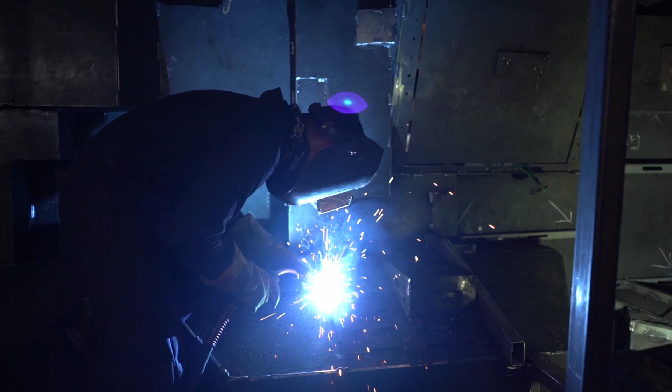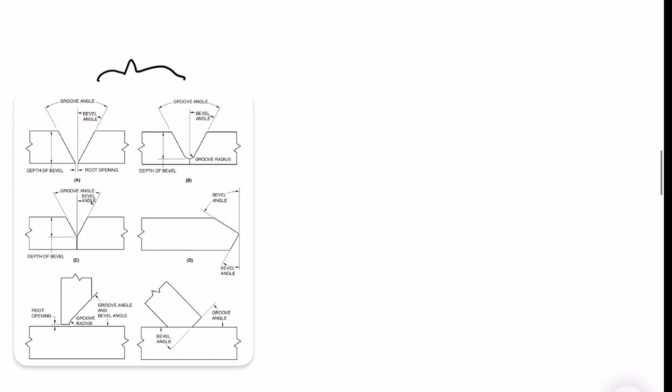Welding and inspection personnel must be capable of identifying individual features that make up the joint, as you can see here. This is a groove joint. Now, if you join the two of these, they are now called a groove weld.

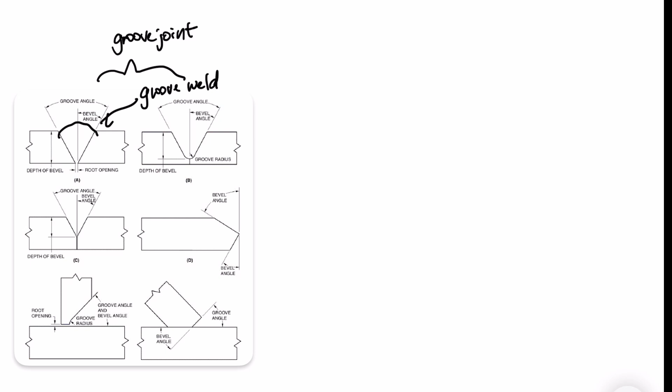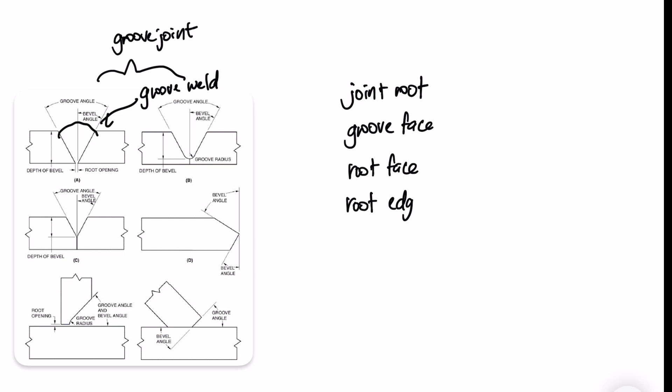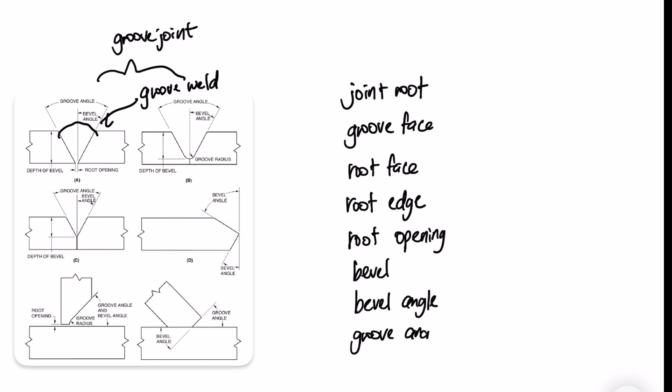It is imperative that welding inspection personnel be familiar with these, because these welds are very common in the industry. The following nomenclature are common for these, such as the joint root, groove face, root face, root edge, root opening, bevel, bevel angle, groove angle, and groove radius. Now let's run it down one by one.

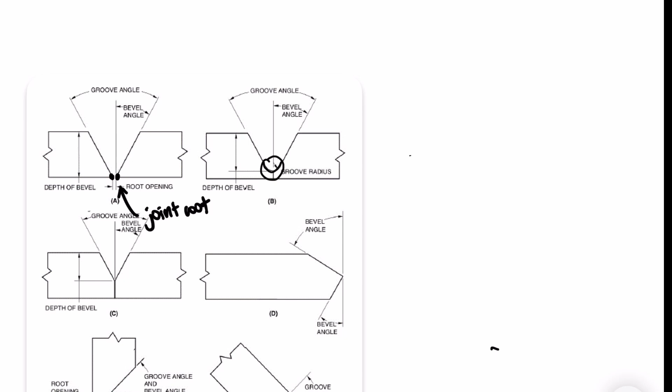Now first, we need to identify where the joint root of these work pieces is. Now this is the joint root that we're talking about. This point, or this joint root, is the beginning of the root opening that will denote the separation between the two work pieces. Now if you can see this line right here, this shaded line, this is the joint root where it denotes the beginning of the root opening. Now this line is the joint root.

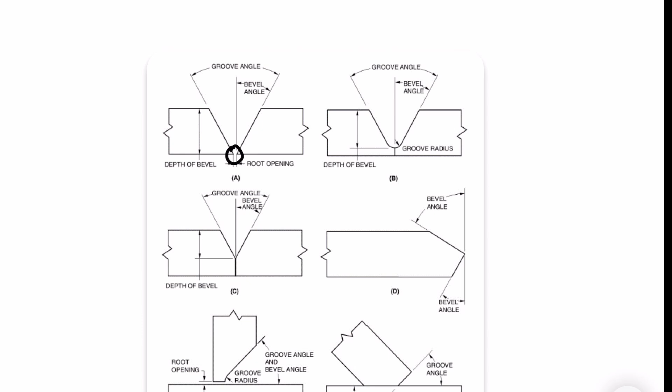Root opening, as you can see here, is described as the separation between the two work pieces. Now these are the work pieces. Now this has an opening of about 1 to 2 mm, depending on the size, depending on the specification. Sometimes I saw 3 mm in some of the drawings that I've encountered.

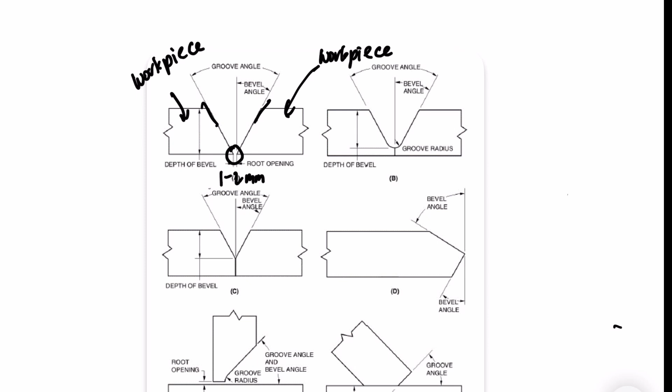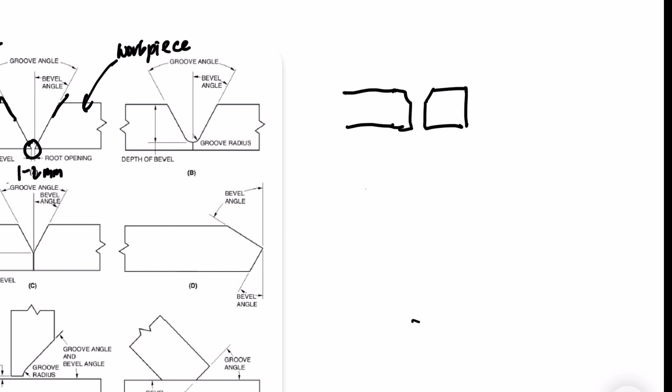And the bevel, as you can see here, is the angular edge preparation that is commonly known for welding fitters. For example, if you have a pipe here, these are the bevels that are commonly prepared by pipe fitters. An exaggerated view of it. Now this bevel is also known as the chamfer in some cases.

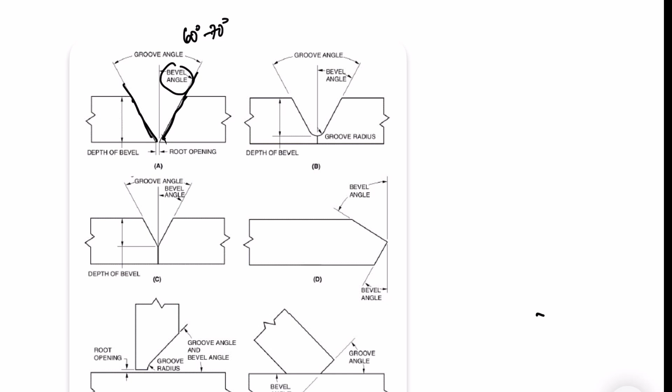Now the groove angle is the total included angle of the groove between the two work pieces, as you can see here. I saw some specifications that specify this groove angle at about 60 degrees to 70 degrees, something like that. And the bevel angle is the same as the groove angle, this one. They are basically the same if the weld looks like this, a single bevel groove weld, wherein the groove angle and the bevel angle are the same. Usually for these kinds of welds, the bevel angle is 1/2 of the groove angle.

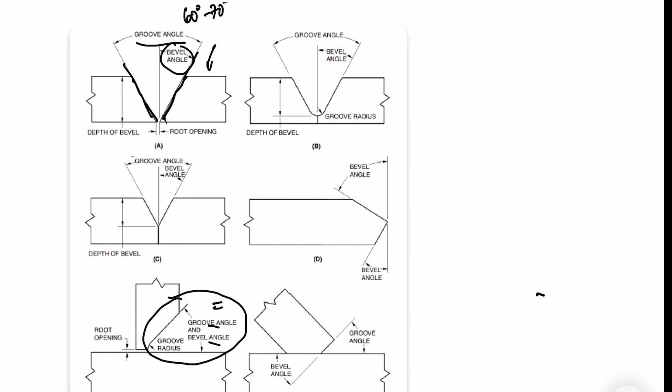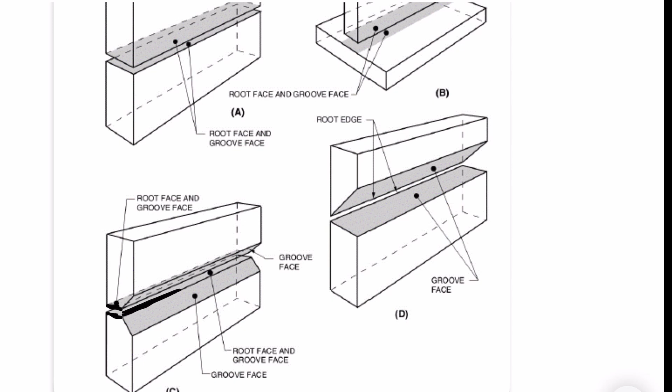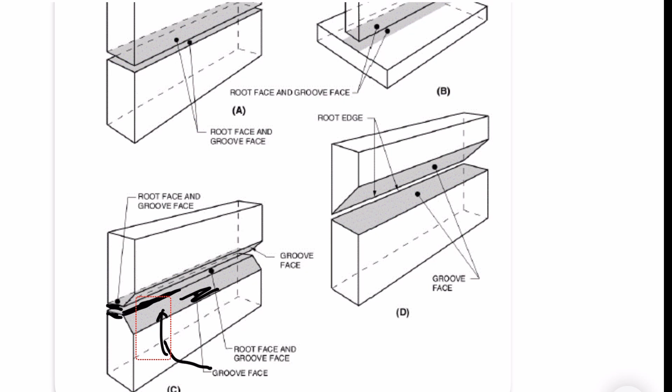How about the faces? The groove face and the root face. This is an illustrated example of the root face and the groove face. Basically, the root face is the portion of the groove face within the joint root. As you can see, this is the joint root, and the portion of the groove face that is at the joint root is this one. So this is the portion of the groove face that is within that joint root, and the groove face itself is the surface of the groove, which is this one. The groove face, this one. If you're going to look at the elevation view or the front view of it, this is the groove face.

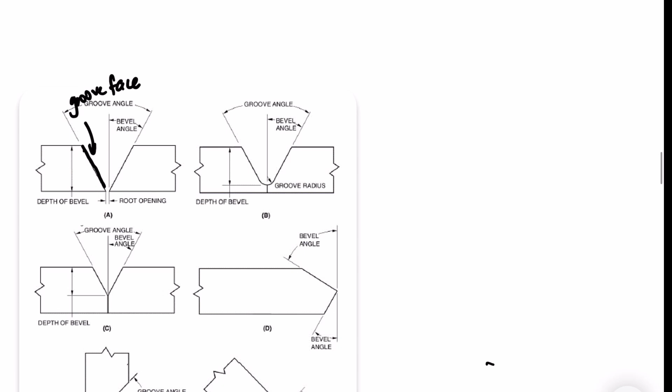The root face in this kind of preparation, wherein this is the root face, this side, and this is the groove face.

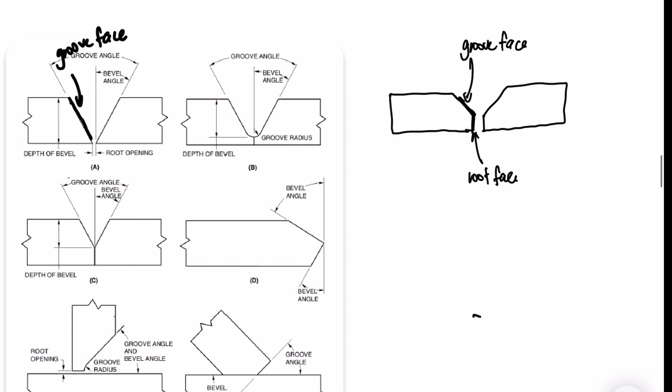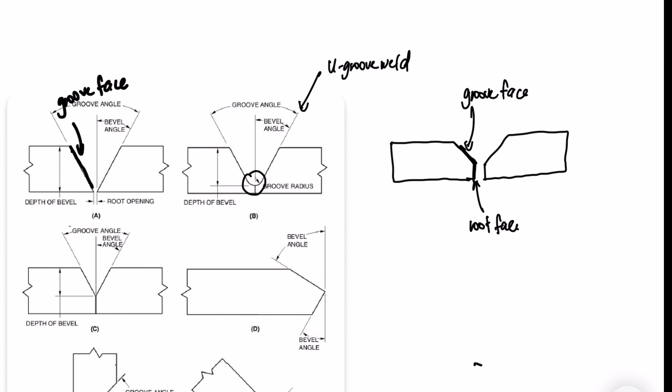The groove radius only applies for J or U groove welds, just like this one. This is a U groove weld. You need to be familiar with the types of weld geometries that you'll be encountering, as it will also be a good part of the CWI exam under the welding symbols. Now this is the groove radius, wherein it has a radius within its preparation.

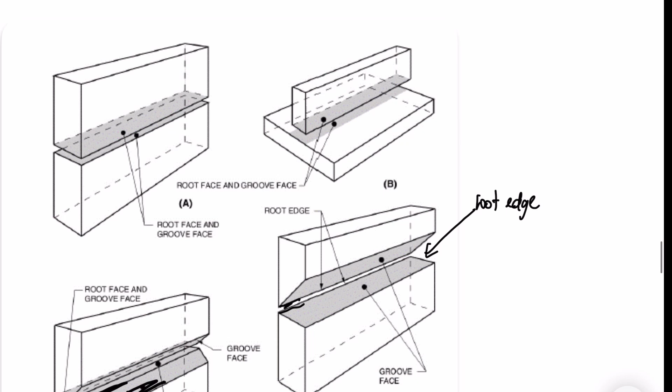Now we've talked about the joint roots. Now the root edge is the edge, this one, that joins the two work pieces. Now this is the root edge. The root edge is also known as the root face with zero width.

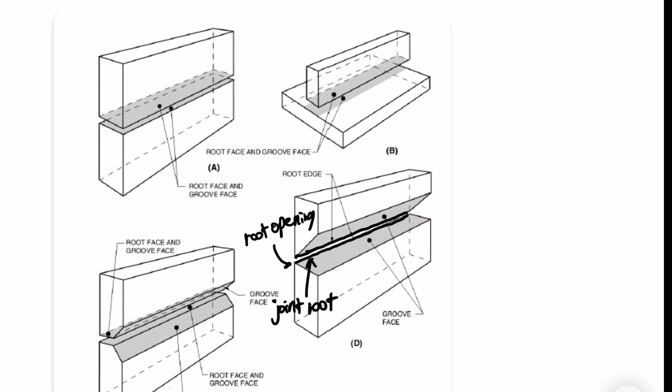Now that's it. A short video regarding the groove weld design. I hope this helps you prepare for the CWI exam, as this will be an intricate part of the CWI Part A.